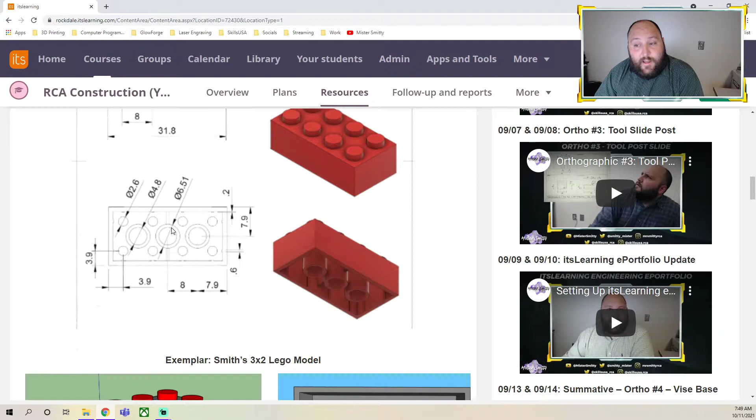Accurate dimensions — again, you need to have your dimensions. I don't have mine on the exemplar because I wanted y'all to see the whole thing, but your dimensions need to be present and accurate. So if it says the diameter of the circle is 4.8, then on yours it should also say 4.8. Every time you're missing a dimension or it's not correct, that's another minus 3. And of course, putting your name on it at the end is 10 points also.

Pretty straightforward. You're going to have 2 class periods. 8A, y'all have the PSAT on Wednesday, so y'all might get another one next week. But for the most part, guys, you've got this week. So when you're done, you're going to submit it here. That's the extent of your summative, all right?

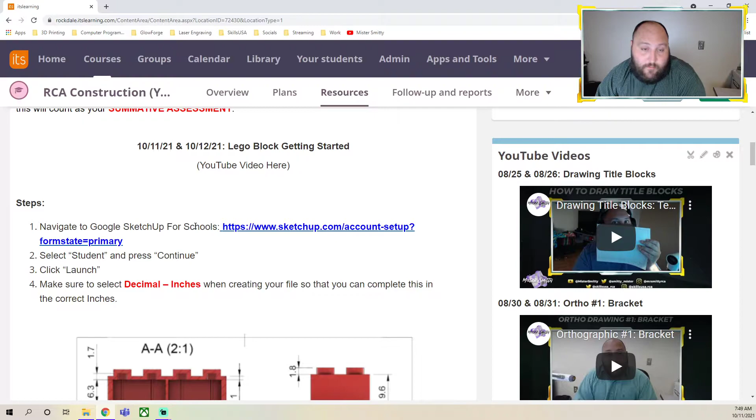So quickly, I do just want to help you guys start. I'm not going to do very much, but I'll help you get started. Of course, as always, navigate to Google SketchUp. I'm going to open that up in a new link, then I'm a student, continue, and launch. I'm going to wait for this to load, and while I'm doing that, I'm going to move my camera down here.

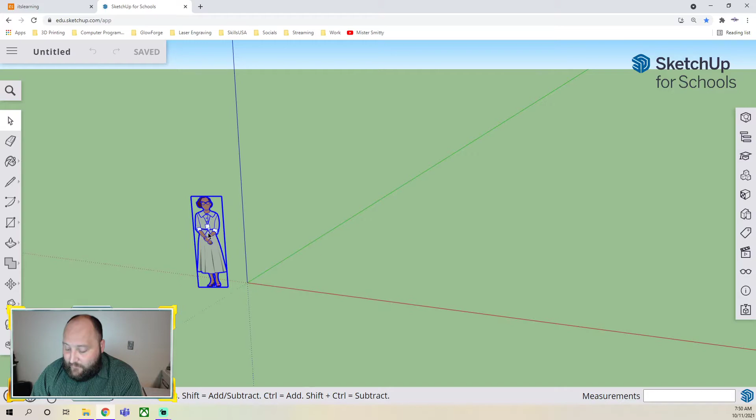Once you're in Google SketchUp, you're going to do this little drop-down. Last time I modeled, I used centimeters, but remember on the rubric, on the grading requirements, it's inches — inches is what you need this time. So make sure you select decimal inches. We can go ahead and get rid of our lady, and then we want to save.

I know some people are having issues with saving. If that's the case, just make sure you're taking screenshots throughout so that you don't lose anything. I'm going to call this YouTube 4x2 Lego. Got mine saved.

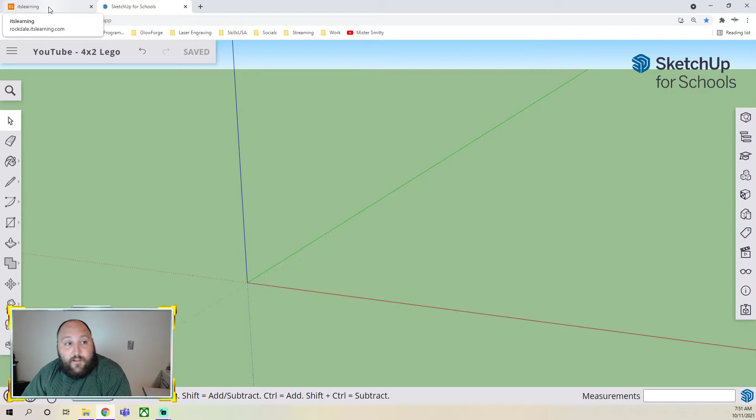So again, guys, what I'm looking for is precision. Just take it step by step and double check your measurements every time. You're going to come up here. I see that the overall shape of this thing is going to be a rectangular prism. And right here, I can see that it's 15.8.

I'm actually going to right click on the image and open it in a new tab so that I have it a little bigger. So 15.8 by 31.8.

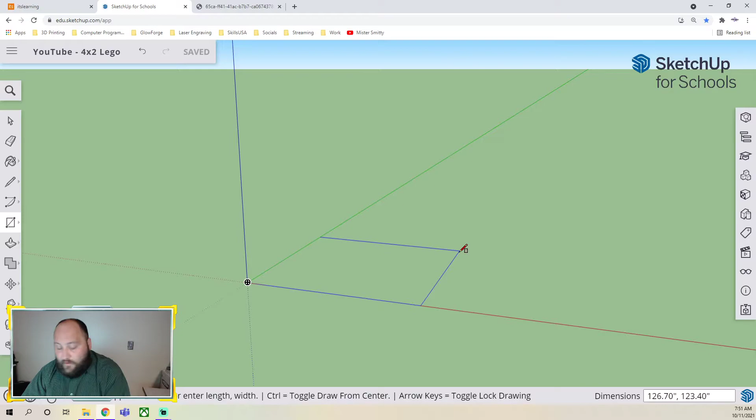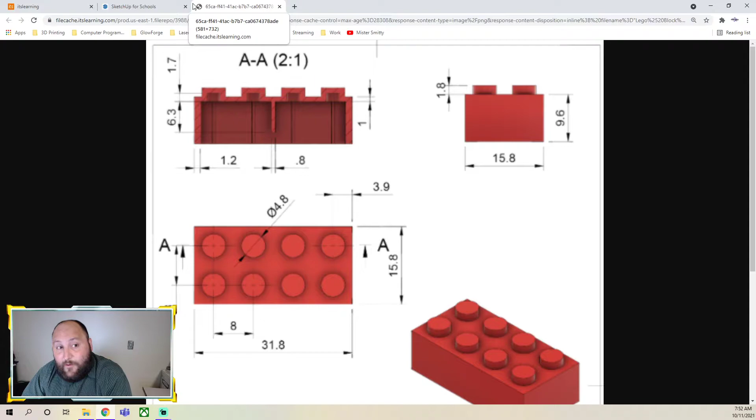15.8 by 31.8. I'm just gonna grab my rectangle tool here and type 15.8 comma 31.8. Remember, I want you to do this in inches, because when we export it into our slicing software, it needs to be in inches. So it's gonna work out.

Now I've got the base here for my Lego. The way you make sure your dimensions are correct every time is to grab your dimension tool every time you do something. So I know that that's 31.8 and that's 15.8. I can go back and check, 15.8, 31.8.

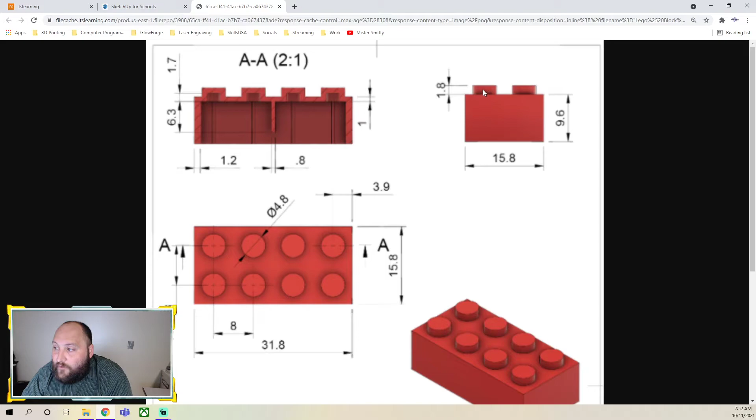Now I have these circles, but I'm gonna do those after I pull this thing up. So how tall is it? It looks like it's 9.6 plus 1.8, so 9.6 for the bottom, and then our circles on top are 1.8. So I need to come up 9.6. I'm gonna do the push-pull tool, pull it up 9.6, and again, dimension tool.

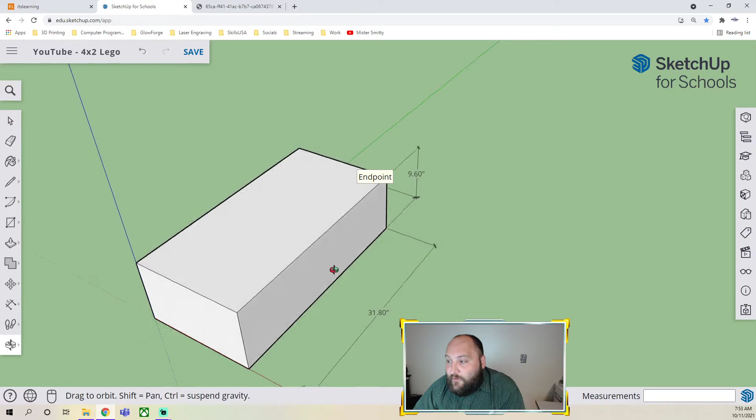Let me move my camera, maybe just right here. Dimension tool's right here. Dimension that, 9.6. Just double checking, I've got my 15.8, my 9.6. Looking good. Now I come over here and I can go ahead and do my circles on top.

But they need to be spaced correctly, so they're eight in between each other. How far from the edge are they? We gotta find that measurement. Okay, so right there, 3.9, 3.9 this way. Yep, 3.9 in. Oh, it looks like they're 3.9 and 3.9.

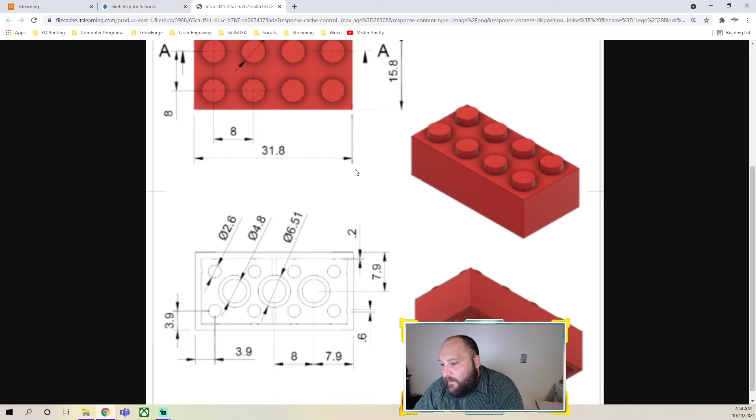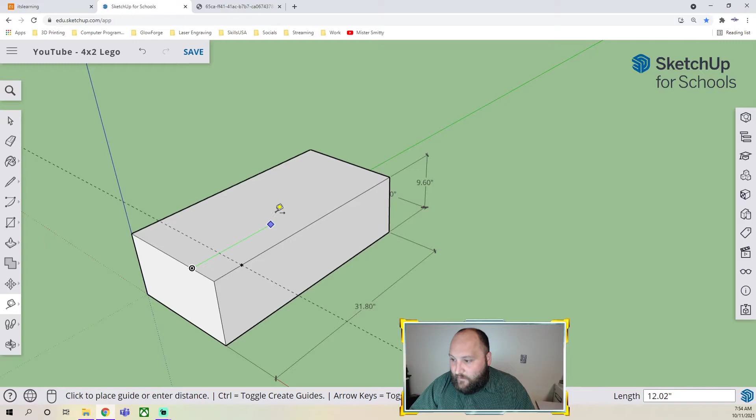So you're gonna take your tape measure tool, come down. Tape measure tool is how we draw guides for ourselves. 3.9, enter, and then I can just draw a line across. Come this way, 3.9, and then a line across. So now, this side in, 3.9.

At this point, I've started to map out where my circles are gonna go. So I'm gonna go grab my circle tool. My circle is 4.8 diameter, so it should be 2.4 radius. I'm gonna start drawing the circle and type 2.4, enter. Circle, 2.4, enter.

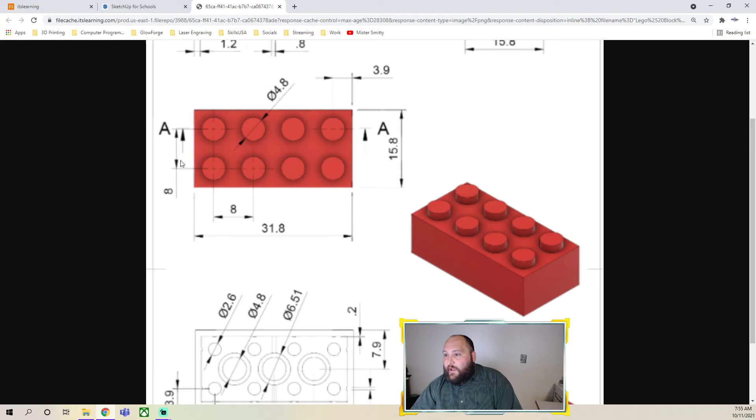I wanna double check that this is correct, and in between these two should be 8 in between. I'm gonna go ahead and grab that dimension tool, check the distance between them, and it is 8. So I know that these are correctly on top here. So I drew the first two.

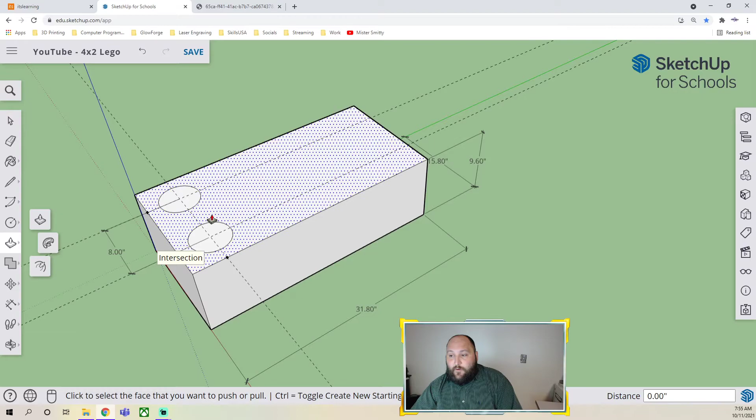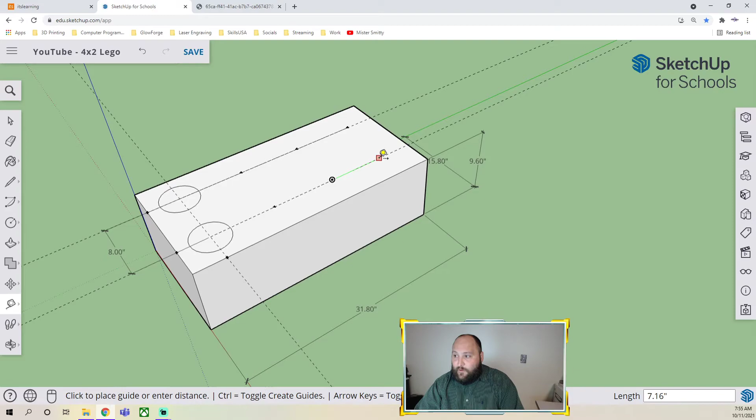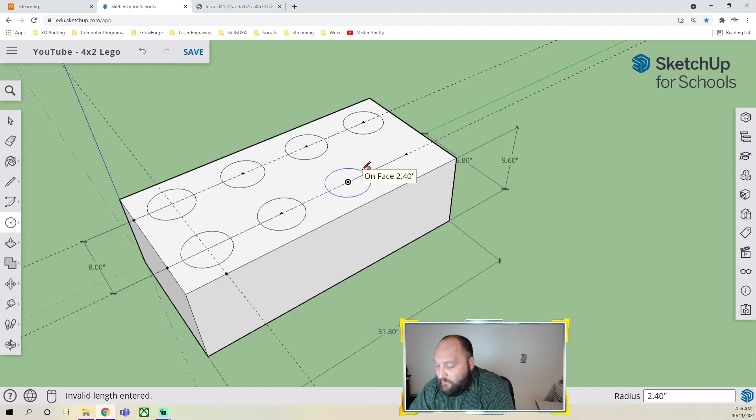So your next step would be to take your tape measure tool, and again, there's 8 between them. So between every circle is 8. I'm just drawing guides using the tape measure tool that are 8, pressing 8 enter every time. That's gonna let me put these circles where they need to go. So there we go.

So want to make sure I dimension, right? Dimension tool. Go ahead and dimension one of my circles maybe. So 4.8 diameter, that's what I wanted. So yeah.

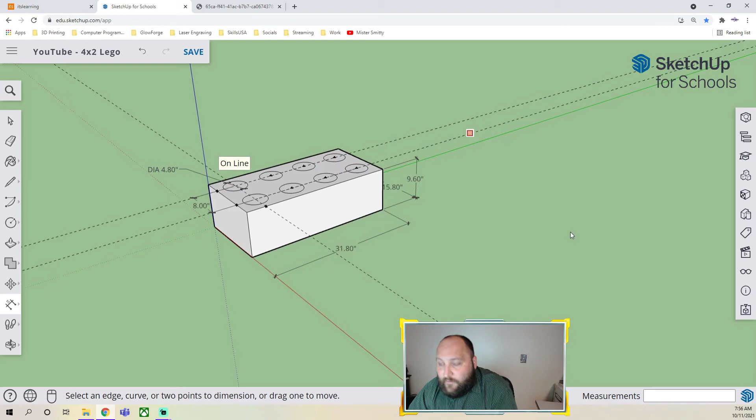So guys, I've gotten you started on this. You need to take care of the top, do some extrusion. You're gonna do a cut on the bottom, then you're gonna do some more extrusions and cuts. But this is your summative. I got you started just to kind of get your brain going in the right mindset of how to approach this, but it's up to you.

So again, keep in mind that grading is gonna be based off precision and accuracy. Make sure you're using decimal inches, make sure you have the correct techniques, so extruding, the surfaces look correct, etc. And then dimensions, make sure the dimensions are on there and everything is accurate.

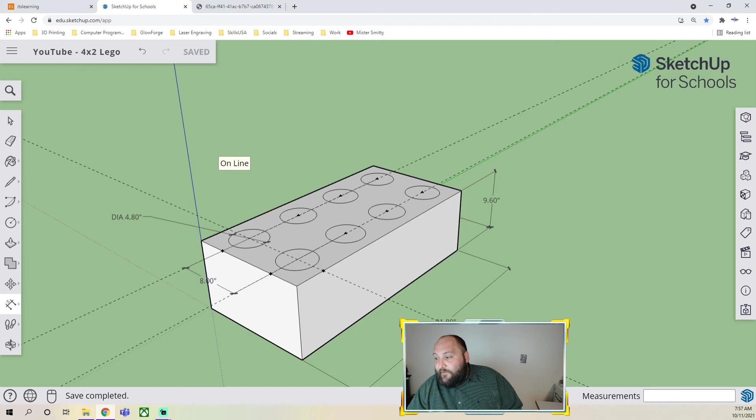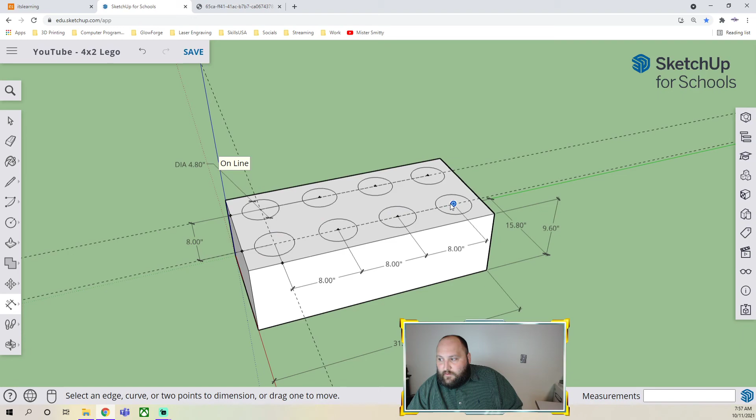It must match: 15.8 by 31.8, mine says 31.8 by 15.8. 9.6 high, yep, 9.6 high. 4.8 on the diameter, 8 in between them. Let me check these, 8 in between these, 8 in between these. Let's check 8 over here. So everything is dimensioned correctly and accurately so far.